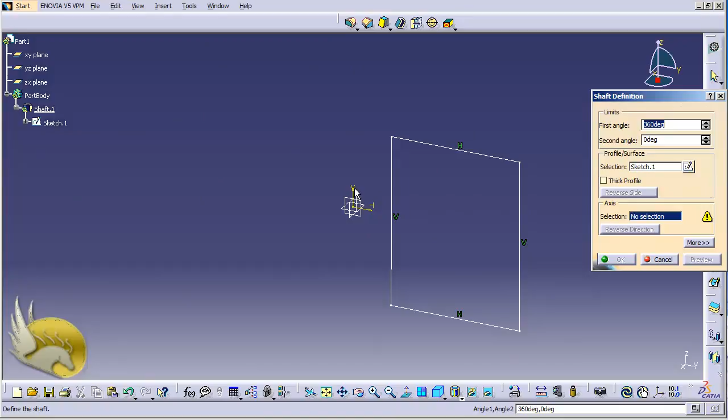If I go to properties, let's see if I can change the name. As long as I'm in sketching mode, I cannot change the name. Okay, that's okay right now. Let's create a very simple profile like a rectangle, and I'm going to use this vertical axis as the rotation axis. So I exit my workbench and I click on the shaft tool. You can see that the sketch is selected. The axis of rotation is going to be this vertical axis, and now I receive a shaft here.

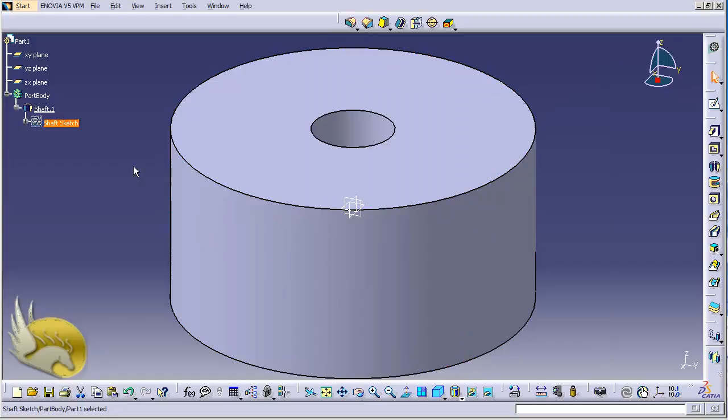Now I come back to YZ plane again. Let's see if I can change the name of the sketch here. No, this is not possible. Oh, of course, the feature name is possible to change. I can type in shaft sketch. Now, whenever I look at this, I will understand that this sketch is used for shafting. So let's select the YZ plane again and go to the sketching environment. And now if I right click on this and go to properties again, I can see that it is possible to change the name. I'm going to use this for groove, so I type in groove sketch here and hit OK.

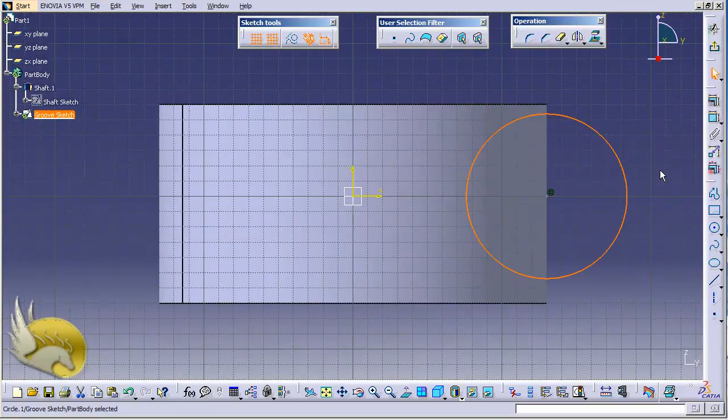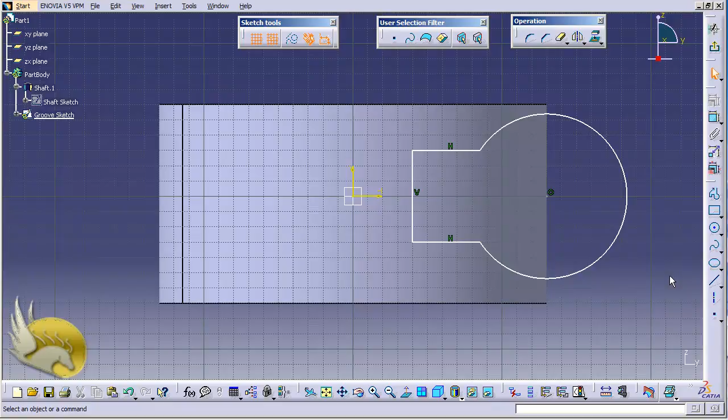And now I add a circle. For example, the circle is going to be this big. Now let's rotate a little bit to see if we are cutting the whole object. I'm not cutting the whole object. I go to add a rectangle to this, so I click and drag a rectangle here. I select the quick trim tool to remove unwanted lines here. I don't want to have these lines. So I select this, this, and this. And now I have a complex profile. Combining the two objects will give me this kind of profile.

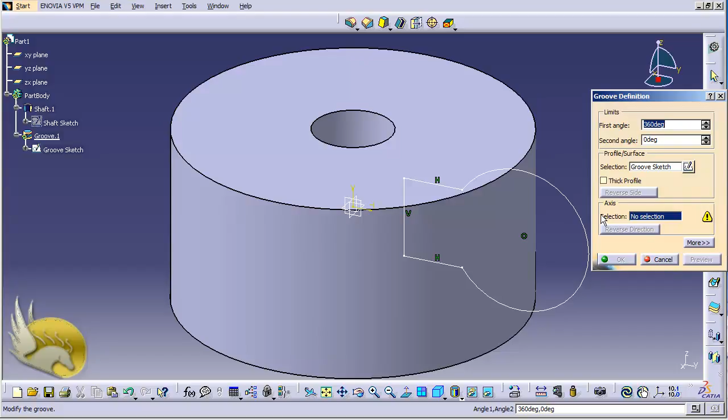So I exit my workbench and select the groove command. This is exactly the same as the shaft command. You can have grooving in both directions. You can add the angle in both directions. I want it to be 360, the whole shaft. So I select the axis of rotation, that is the center axis of the shaft. I click OK, and you can see that this is created for me.

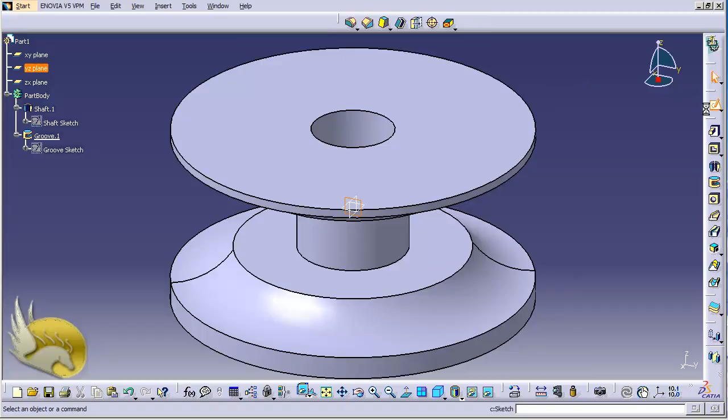Now I'm going to show you how you can use multipad features. To create a multipad, you should have a sketch that is combined of several objects. So I go to YZ plane again. I want to create it in this area, in this view. So let's pan to the left. I press Ctrl and left arrow key several times to pan to the left. And now I want to create a simple profile like this. And I want to have, for example, a circle in this.

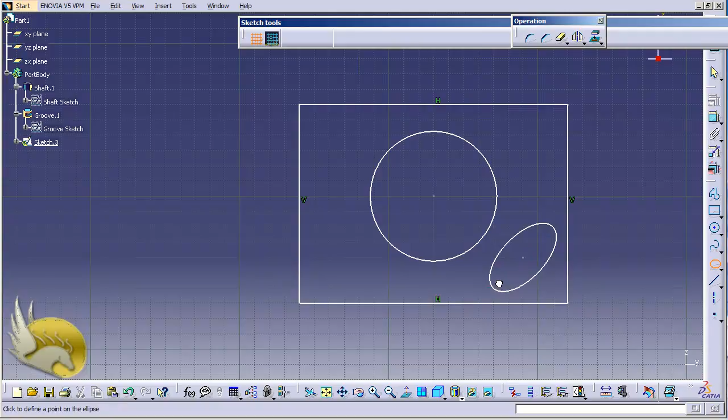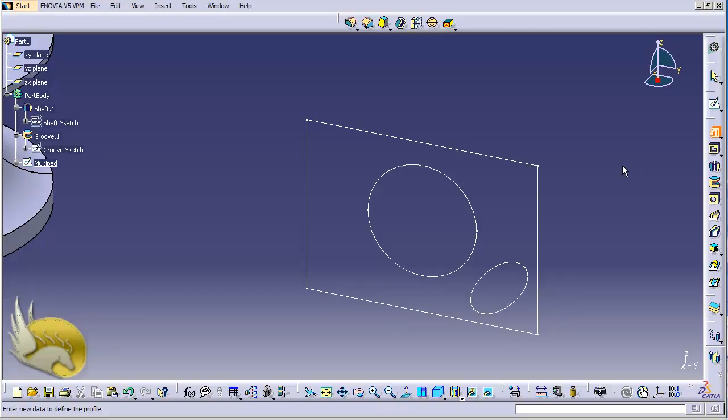And I want to have an ellipse here, like this. This is the center of the ellipse. This is going to be the major axis, and this is going to be the minor axis. So I have 3 items in this sketch. Let's rename this sketch to Multipad. And let's exit. Now that I have several items in one sketch, I can use these items for multipad. Multipad is under padding, and by selecting this, I can select the sketch that I want to have as multipad and click here. The dialog box recognizes 3 different items in this sketch.

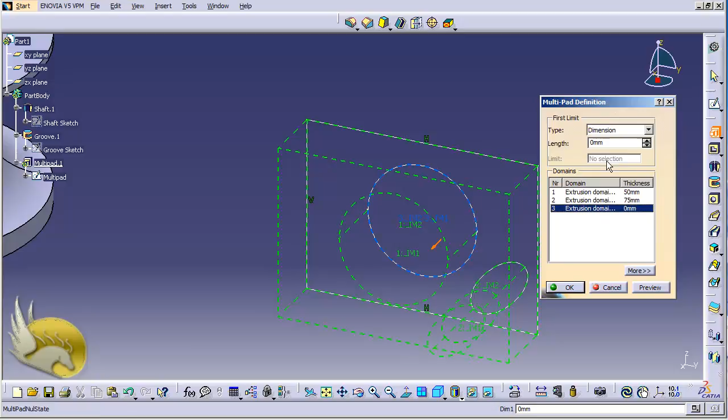You can click on one item and set it to, for example, 50 millimeters of padding. Now I click the second one, and I want the second one to have 75 millimeters. But I want the third one to be, for example, 55 millimeters. So I click OK. You can see that this multipad is created like this. Different parts have different paddings, and by rotating, you can see I have different amounts of padding.

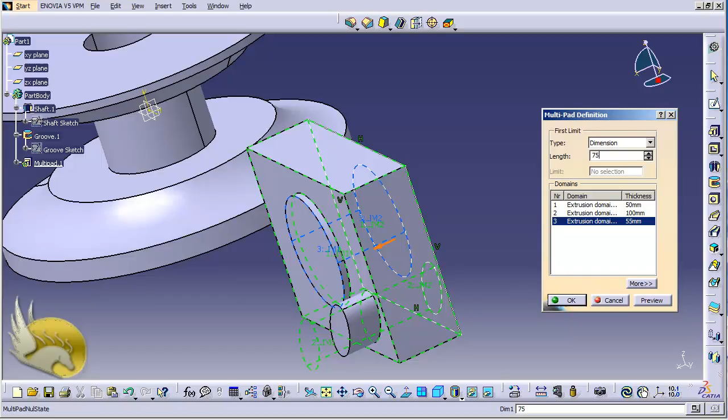Whenever I want to change this, I can go to Multipad, double click on it and select the padding that I want. For example, I want it to be 100 millimeters, and the third one, this one here, I want it to be 75 millimeters. Now I have different amounts of padding applied to my shape, and you can see it better than before. Now let's go to the back of this shape.

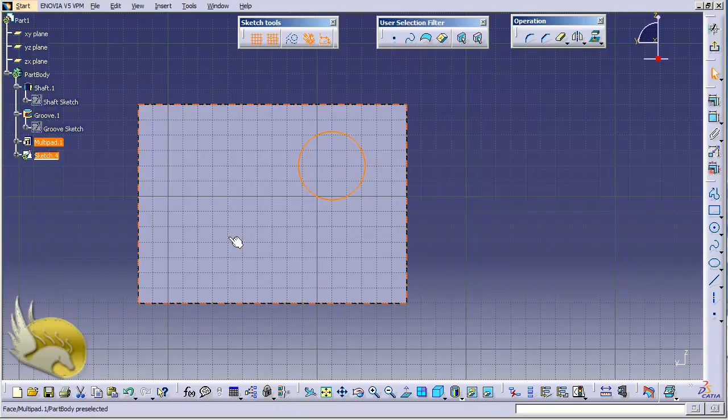I want to select this face as the plane that I'm going to draw the sketch on. I go to sketch mode, and now I'm aligned to this, so I add one circle here, an ellipse here, and a rectangle here. I should create the ellipse better than this. I didn't select the major axis or minor axis correctly. I want a rectangle here. Now I exit my workbench again, and this time I'm going to select Multipocket.

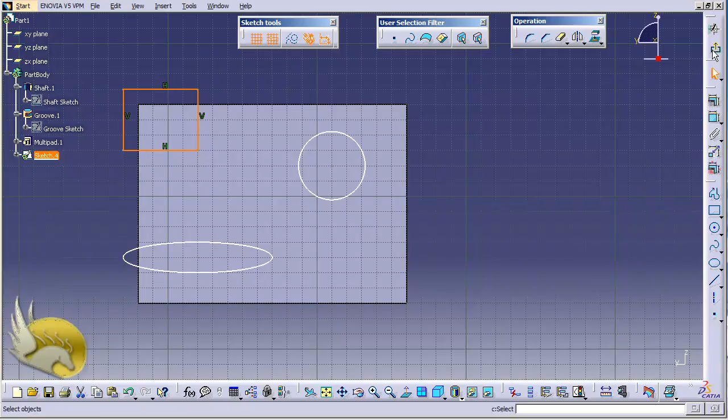This is under the Pocketing tool, and Multipocket recognizes 3 different shapes in one sketch. Let's select them one by one. This is the rectangle, highlighted in blue, so I want it to be 20 millimeters, and you can see that 20 millimeters is here. The second one is the ellipse. I want it to be 35 millimeters. And the third one is the circle. I want it to be 10 millimeters in depth.

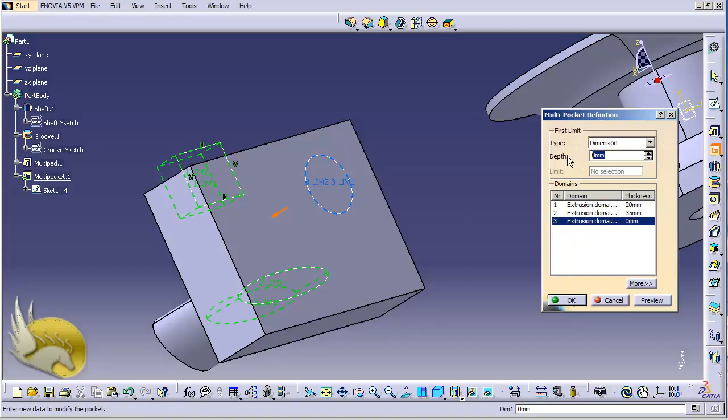So I click OK, and you can see that these multiple shapes in this sketch are used to cut through the object that I created previously. So Multipad and Multipocket are very nice features whenever you want to have different amounts of padding and pocketing in one sketch.